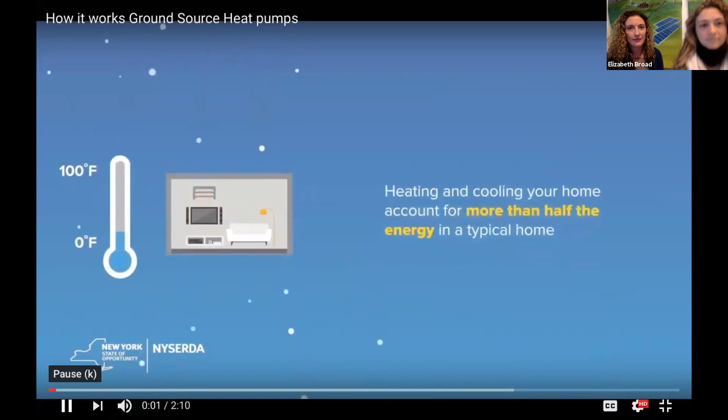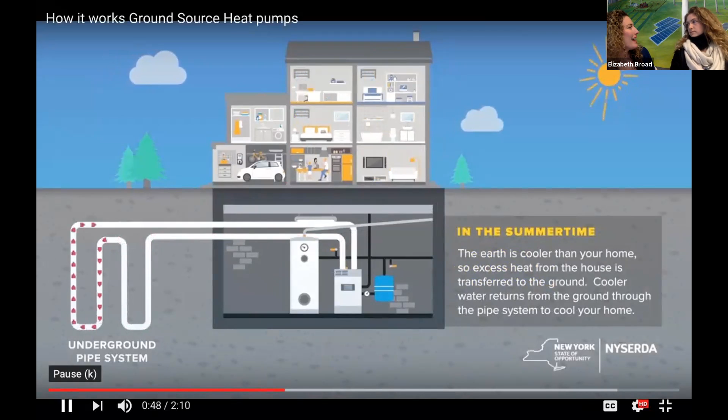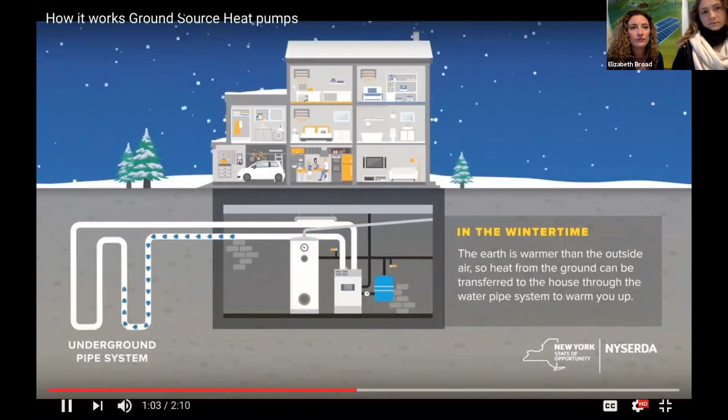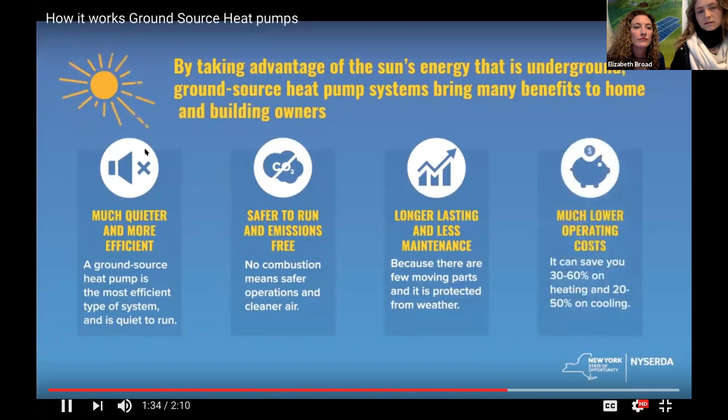All right, just a little intro video for you.

So now we were thinking about, John, do you still want to go next? Or, oh, we're a little bit of an echo. Could that be from Facebook? Possibly, should we try to mute that? Sorry folks, technological difficulty.

So all right, I have Donovan's slides, so I could run his slides or I can go first. Doesn't matter, but I can share his. Okay, that would be great. So Donovan, does that sound like a plan to you since we can't access your screen? Yeah, that's fine, if you want me to go first, yeah. Okay wonderful, so John is going to get your slides up.

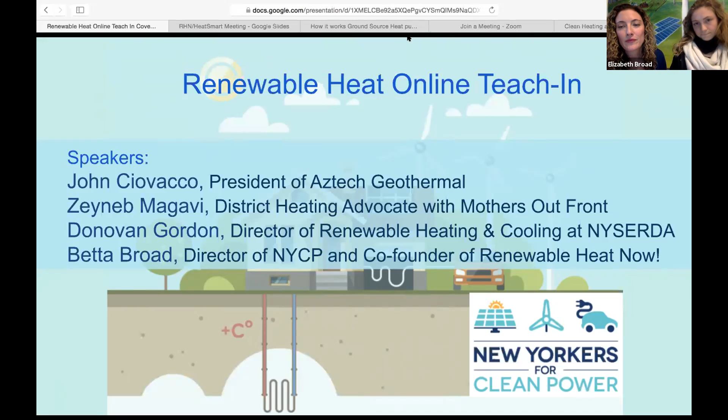Okay, so did we see Donovan's slides? Does Donovan know what slide we have up? Yes, I do. I can see it, John. Well, I know we're on the cover page, so we can just go.

Donovan Gordon, Director of Renewable Heating and Cooling. I'm going to talk a little about some of the programs we have, some of the initiatives that we've been directed to do through DPS, and also talk about what's going on in Westchester, because as most of you are aware, there's a moratorium on new gas connections. So we're doing some things to help in that area as well.

So I guess we can go to the next slide. Working on it. Okay. Next slide. It's good? Yes. Yes, I do.

So I just want to give a general overview. This is sort of the REV goals. There have been other goals set up since then, but the ones I really want to stick with are the 40% reduction in greenhouse gases from 1990 levels by 2030, and then by 2050 we want to reduce our carbon emissions by 80% from our 1990 levels. So really aggressive carbon reduction goals.

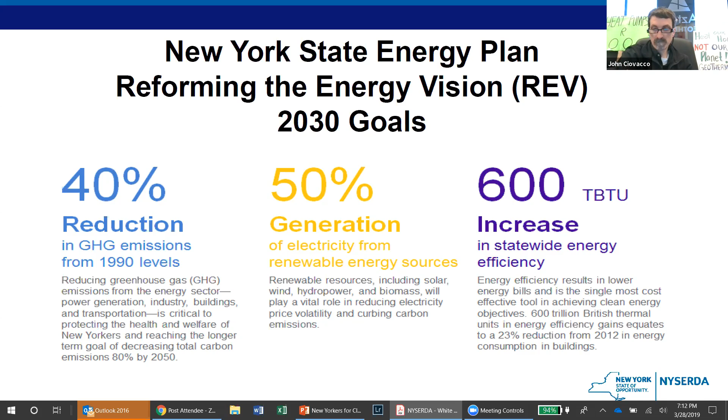So we can go to the next page. I won't dwell on the other parts.

So why is the topic of clean heating and cooling relevant in New York State? Well, a third of all the carbon emissions in New York State comes from buildings, the HVAC systems in residential and commercial buildings. About 41 to 42% comes from transportation, so we do need more EVs. About 20% comes from electric generation. So we have one of the cleanest grids in the country. And as car manufacturers make more electric vehicles, that will take care of itself. We don't make vehicles here, but we can directly impact buildings through various means.

So now we're introducing a new concept, a new term of art called beneficial electrification through heat pumps, because it can help decarbonize the heating and cooling sector. The reason we say beneficial electrification is because for years a heat pump has gotten attention, but not a lot of support, because DPS and others focused on using less energy, energy efficiency. But because so much carbon comes from buildings, and we want to electrify heating with heat pumps that do not emit any carbon on site, we use the term beneficial electrification. So there is a benefit to society for increasing electric usage rather than using fossil fuels for heating.

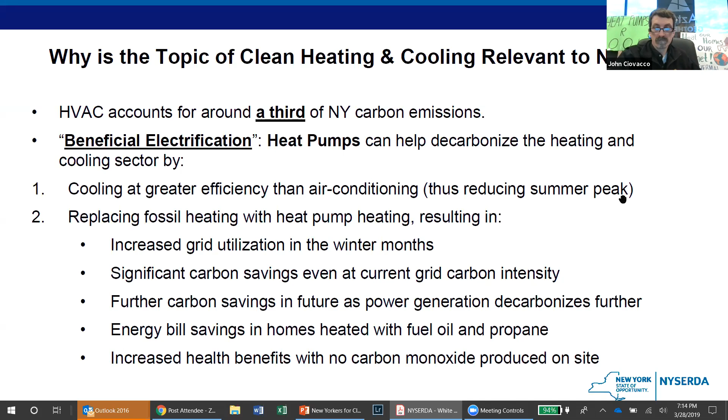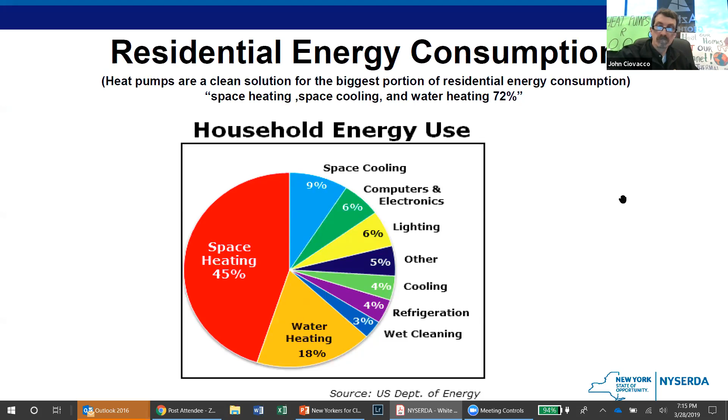So electrification of heating right now, for the foreseeable future, we think at least the next decade or so, there's enough electrical capacity in the grid as it is to accommodate heat pumps, and this would actually utilize the system much better and more efficiently. Quite frankly, each point of increase in utilization, going from 54% to 55%, is about a little over $200 million in ratepayer benefits. So it really is good for ratepayers to increase system utilization because the utilities' revenues are fixed. Any increased revenue they collect above that, they have to give back to the ratepayers. So heat pumps actually help your electric rates come down. Next slide, please.

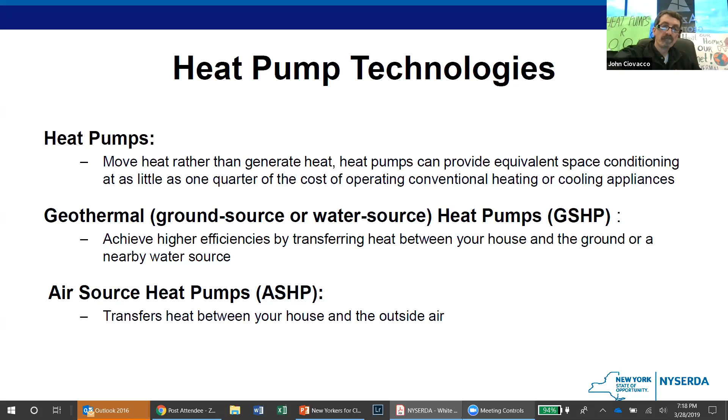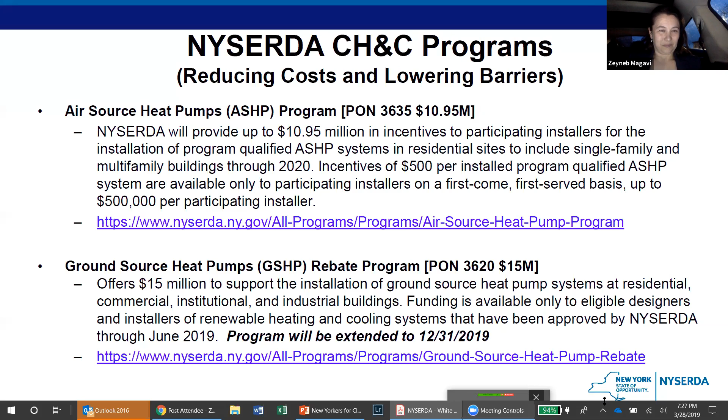For geothermal, it's $1,500 per ton, and the average home is about 4 or 5 tons, so the average incentive is between $6,000 and $7,500—that's actually a pretty good buy down. The air source heat pump incentive is just $500 per unit, but I'll get to another slide addressing that as well. The good news is we're extending this program to the end of this year.

Next slide, please. Oh, you went back—okay, you did go back.

Okay, so now to address awareness: co-op advertising and training. This addresses the lack of trained installers, where we put out about $1.5 million for co-op advertising.

It's cost shared 50-50 with contractors and distributors to do local marketing and advertising. So if they want to run an ad in a local newspaper or elsewhere, they send a copy of the ad to us, we'll vet it, send it to our marketing group, and cost share 50-50 if we think it's an appropriate ad.

And for training with manufacturers, contractors and distributors will cost share 50-50 up to $50,000 per year, same as the co-op advertising, for any kind of training they want to do. Actually, we're close to running out of money there, so that's been a very successful program so far.

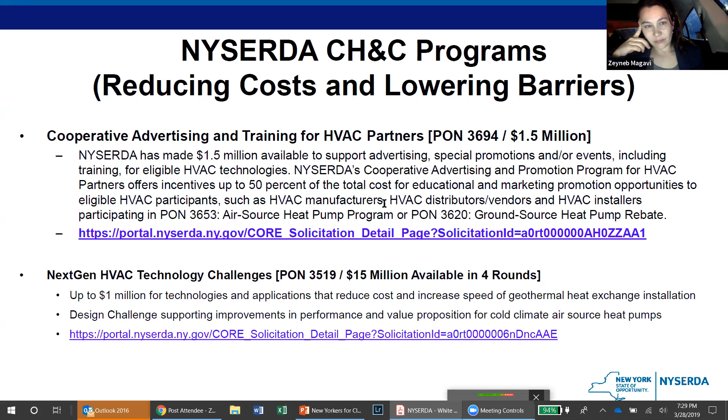And the next gen, that's just our R&D. We're really trying to see what the next gen solutions are. So we're looking at all sorts of different things, from the antifreeze that's used in the loop fields to cold climate heat pumps to, boy, oh boy, so many, the drilling techniques, whatever, the whole gamut. We're open to looking at new and innovative technologies that could help us scale, but also help reduce costs and improve performance.

So in December of 2018, the Department of Public Service issued an order titled Order Adopting Accelerated Energy Efficiency Targets. It's a pretty lengthy document, but what's relevant here is that the order established a target for the utilities to get 31 trillion BTUs of consumer level energy reductions statewide from utilities. However, within that, at least 5 TBTUs of the 31 in reduction needs to come through heat pump deployment.

So this is really great news for the heat pump industry, that the DPS, the regulators, are basically directing and instructing the utilities that part of their order and part of the initiatives they want them to roll out, and certainly in terms of reducing the TBTUs, has to come from heat pumps, and a pretty significant piece coming from heat pumps. I think that equates to maybe 80 plus, between 80 and 100,000 residential homes.

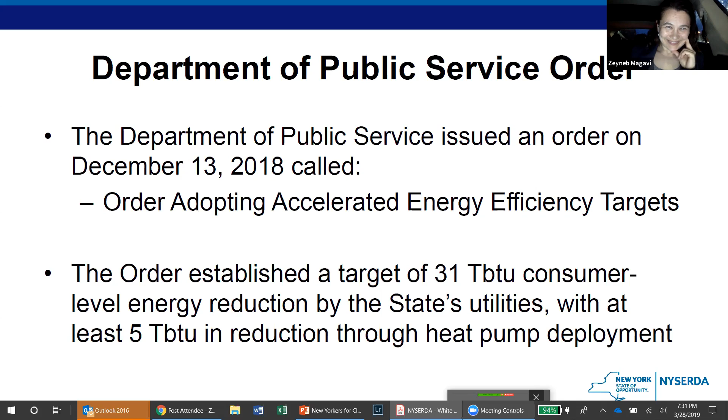So I'll speed up my talk here and run through the rest of it. I'll do double time here now. Okay, go ahead, John. And you can give me the hook anytime, Betta.

Oh, so Westchester, you really want to hear about Westchester, so let's go to the next slide. Westchester kind of imposed a gas moratorium. We've issued what we call a Westchester Clean Energy Action Plan, but we're going to actually drop Westchester off and just call it the Clean Energy Action Plan, to help areas that are impacted by gas moratorium.

So you're hearing this for the first time here. And really, we're trying to help lower energy costs, promote economic development. That's the biggest issue. And in particular in Westchester, the focus is on new construction. That's one of the biggest areas of concern there. So some of these new projects get gas, but we really want to promote and support them getting heat pumps, and obviously do a lot of community outreach and support.

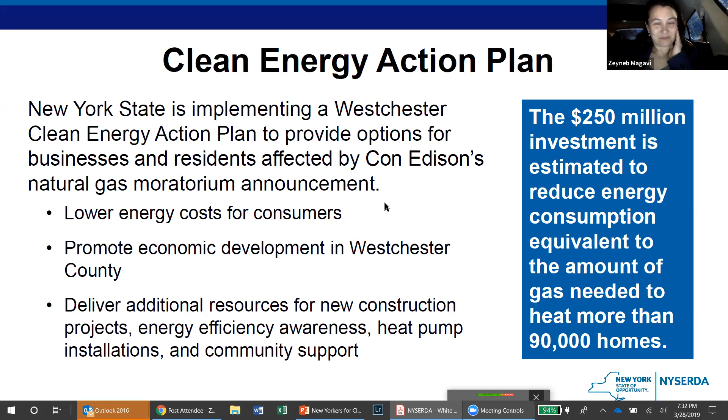So what we're doing, again, this is for the gas constrained areas only. In commercial, I mentioned we had $1,200 per ton. We're increasing the incentives by 25% to $1,500 per ton. And I mentioned we had a cap of 500,000 and $1 million. Again, this is only for the gas constrained moratorium areas. The cap now is $5 million per project.

And we're going to be offering free feasibility screenings for buildings 25,000 square feet or over. For residential, same thing, increasing the incentive by 25%, from 1,500 to 1,875. And for residential, they are now eligible for our financing. We call it Green Jobs, Green New York loans, where they have two options. They can do on-bill recovery, where they pay through their electric bill, or a regular straight loan.

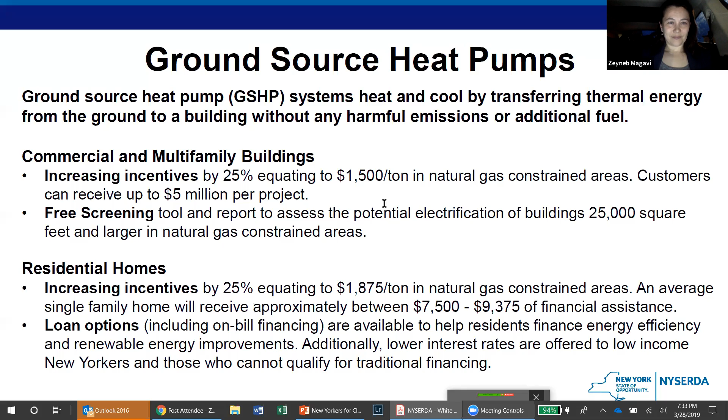For air source, we're also offering free screenings for these large buildings. It's mostly VRF, but for residential, this is something new. We're actually introducing a new incentive, and this is statewide, by the way, of $1,000 per ton for whole house air source heat pump systems.

So this can be ducted or ductless or mixed, ducted with ductless, but it's got to be a whole house solution. They have to issue the contract, have to issue a Manual J, and it's similar to ground source, where the load has to cover at least a minimum of 90% of the full load, a maximum of 120% of the full load. We're working through this, it's not official yet, but I have it in here. So this is a presentation we did to Westchester, so it is probably, it is coming soon, where air source heat pumps will now qualify for our loan program, which is a good thing.

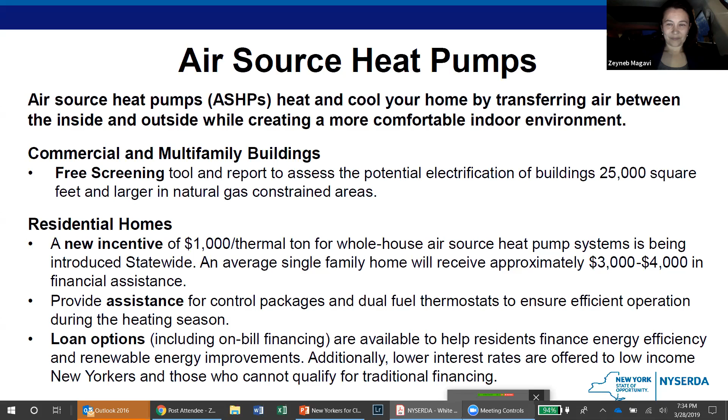Community support—what we've done with Sustainable Westchester, they were focused on an area in northern Westchester which did not have gas, which made sense. Once the moratorium hit, we've actually expanded the scope of their contract, added money to the contract, and we're now asking them to develop some promotions and campaigns down in the moratorium area.

On April 25th, we're not hosting it, it's hosted by a local organization. We are sponsoring it along with Westchester County, and we're bringing large developers and municipal officials to meet and speak with who we believe are some of the best minds and companies in the clean energy space, particularly large-scale geothermal and VRF systems.

The day before that, on the 24th, we're hosting an event to talk about the workforce development needs in Westchester. The response was so overwhelming we actually had to get a bigger room to hold all the people interested in it. So that's the big issue there: economic development, creating jobs, and having something that's reliable, affordable, and viable as an alternative to gas.

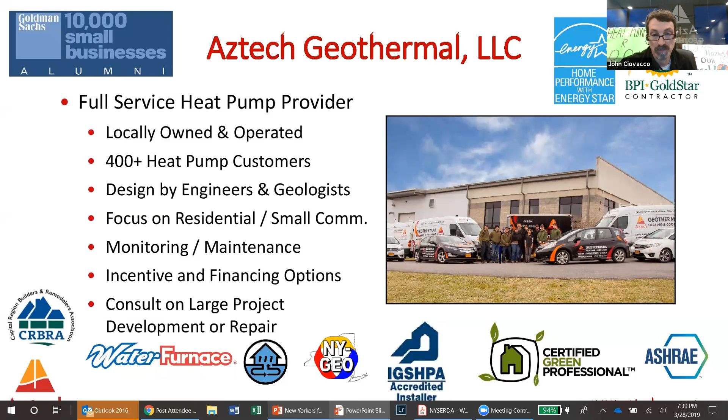And some of the nice co-op work, some of the great stuff, is that video we watched earlier, muted or otherwise, is the background for a piece that we sent out as a direct mail piece. We co-branded it with National Grid, who's now involved, which is terrific. There's lots of things that are picking up, and contractors like us get lots of support now.

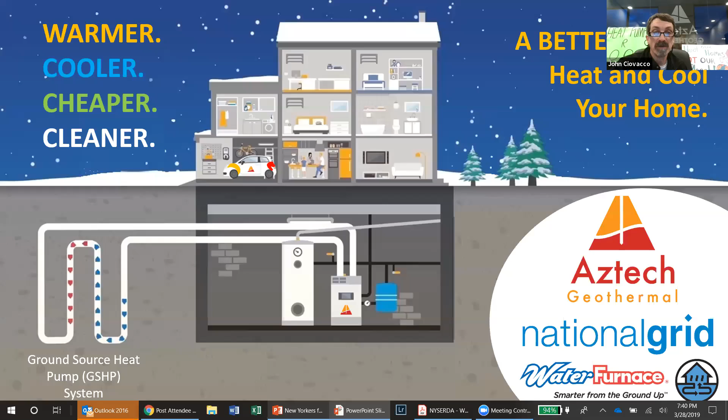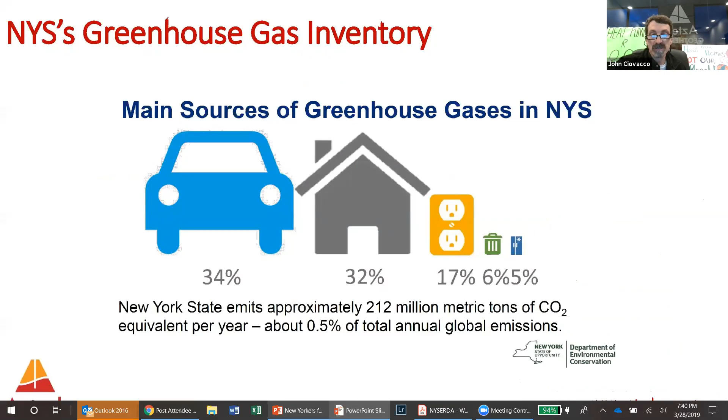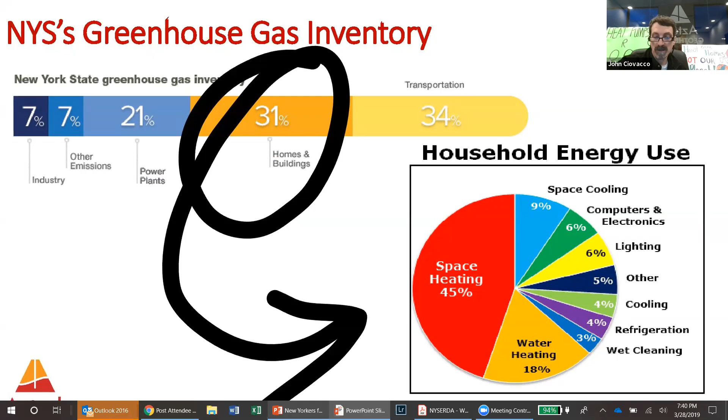Donovan made reference to this, but I think it's important to start with the greenhouse gas inventory, which really tells us where our greenhouse gas emissions come from. Oftentimes there's been such a focus on renewable electricity, which is super important, especially as we get rid of fossil fuels in the building and transportation sectors. But we really have to focus on those big pieces. If homes and buildings are a big percentage, and as Donovan talked about, space heating and water heating and space cooling account for most of that energy, it's really a core part of the strategy New York is implementing, and heat pumps are really the heart of that solution, which is terrific.

The air source heat pumps for water heating have become quite popular. There's lots of interesting economics around where those work well and where they don't work as well in different types of homes, but they're about half the cost and half the electricity of an electric water heater, and they don't use fossil fuels in their ability to make hot water. They're basically using the thermal energy from the basement as their source to make hot water.

The bigger systems, the VRF, I have another slide about that, but that's certainly for larger commercial buildings and can be air source, ground source, or water source. Then there's those different applications of ground source heat pumps that I'm going to talk about more. I'm going to focus more on closed loop because I really think that's a more robust way to go, but that doesn't mean open systems or DX systems can't work very well for certain applications.

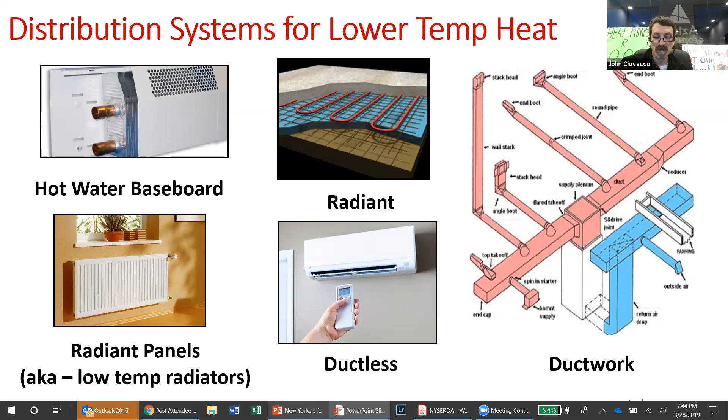You can get a room to 70 with 85 degree air for sure, but you're going to have longer run times. You're going to need a little bit more volume of air to do it. So there's some things that we need to learn as heating and cooling professionals when we apply heat pumps that are different, especially in heating, than we did before.

Let's go into the physics of it all. We won't go into too much of this, but essentially a heat pump system is taking a mild source of energy, the low temperature heat absorbed from the source. So we have tubes out in the ground circulating oftentimes a water solution. That water is bringing thermal energy in and it's going over coils that have refrigerant in them. Those cause those to evaporate. That's the evaporator. That's still a mild temperature, but now the energy is in the vapor.

The compressor makes it warm. We use electricity to do that. The condenser takes that warm vapor and really gets it hot, maybe 160 down to maybe 120 degrees. Then that's really something we can heat a room with. So we're going to blow air over that, or put water over it.

Some of the things that make these systems work particularly well is you'll see the Q1, Q2, and Q3. Q1 is the source of energy, but it's usually a low temperature source. Q2 is oftentimes, in our case, electric energy to the motor on the compressor. And Q3 is the addition of those two. So we're paying for Q2, but that's the small amount of energy. We're getting either energy from the ground or from the air, and oftentimes we're not paying extra for that.

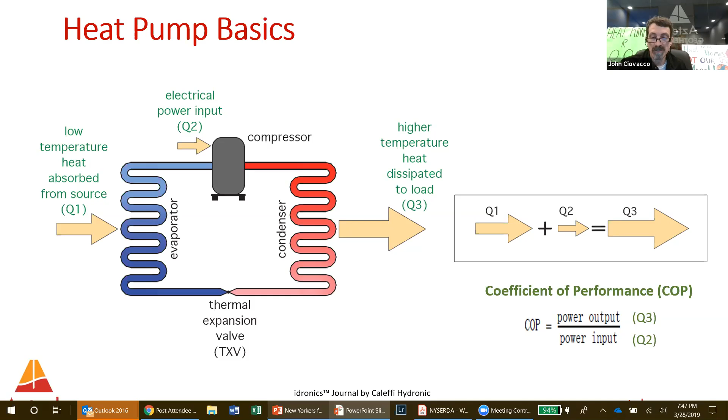A lot of the energy that the ground source system will use comes from the sun. The sun heats the ground, which absorbs a lot of that energy, and then it's stored. So when it's negative 25 degrees in Saratoga Springs and one of our homes is heating with a ground source heat pump, it's basically tapping into solar energy that was stored earlier in the season. So it's a terrific battery, and it gives us the ability to run these heat pumps even when it's very, very cold out, at very high efficiencies.

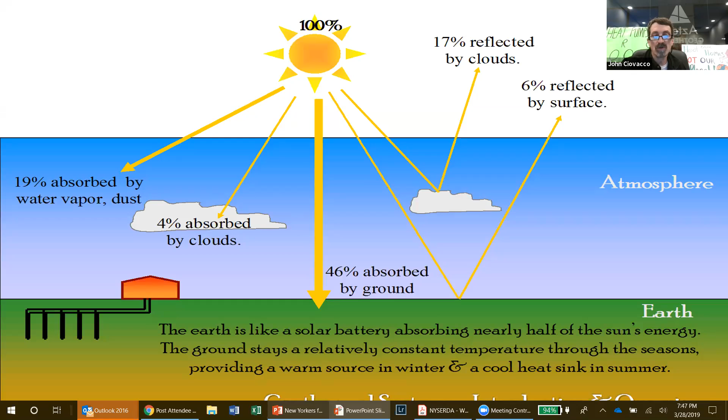Closed loop systems, we bury them in the ground. Horizontal systems in this area tend to be about 6 feet deep and over a large area. Vertical systems tend to be quite deep, so a single family home might have 1 500-foot borehole, which would be a common amount. You might have 2 350s, depending on the size, or smaller ones, but about 1 borehole, deep, more like a water well. But they're not wells. We're going to grout them in and have a closed loop of water that goes down into the ground, pulls thermal energy up into the house, and then the heat pump extracts it.

We have a number of pond loops, probably 12 or 14. When someone has a pond that's proximate to their house and it's the right depth and size, that can be an excellent source and can be less expensive to install because you have less drilling or excavation.

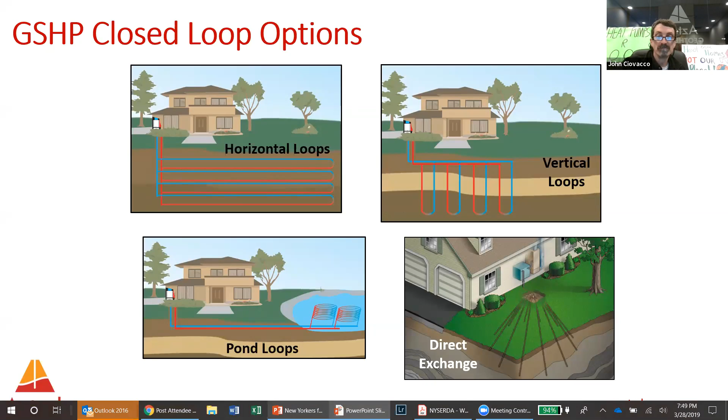This is a real system. You'll see that there's a ground loop that's outside, with 4 trenches buried about 6 feet deep. Then it comes into the house and goes through that black box in the middle of the screen, which has a pump on it, and that brings that energy from the ground to the heat pump and back out to the ground after the heat pump extracts it.

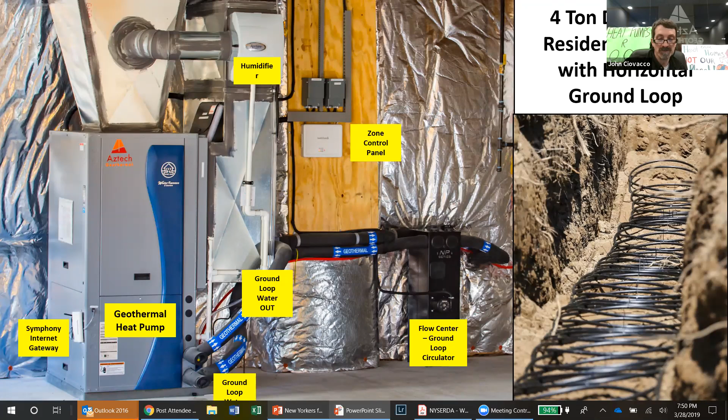But it looks a lot like a furnace. In fact, that one's called a WaterFurnace. So they end up being things that if you walk past them, unless you were really looking for it, you wouldn't see it. It just blends right in and fits in like any other heating or cooling equipment. As a result, lots of contractors are able to install these things. It's not really a terribly specialized skill once you get a little training.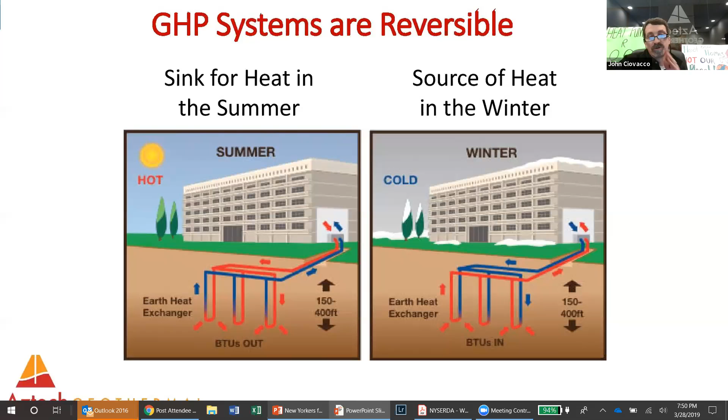The systems are reversible, so they heat and cool. We focus a lot on heating in this climate zone because that's where most of the savings comes from, and most of the greenhouse gas reduction. But as Donovan mentioned, the cooling side can be terrific because there's peak load reduction. They use less electricity on those super hot and humid days where the grid is very stressed, near the limits of our capacity from electric delivery systems, because of air conditioning loads. A ground source heat pump might have 40 or 50% less load on that same day.

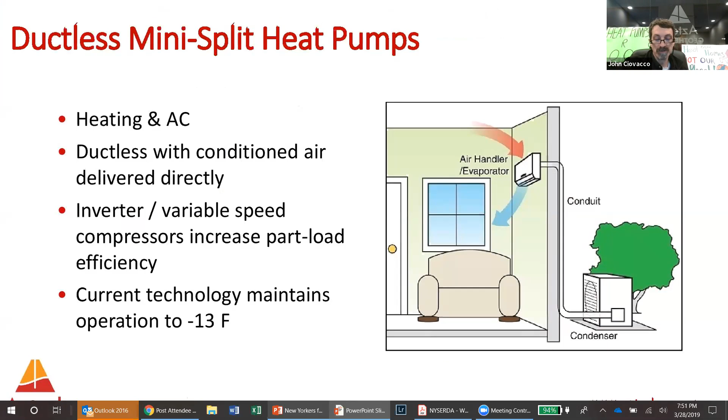Air source heat pumps get that source energy from outside. Even when it's really cold out, you'll see I have -13 there—negative temperatures blowing over these evaporators—they're still able to extract thermal energy, and then the compressor makes it warm enough to heat that room. That particularly works well in a ductless situation because you don't have any losses from the distribution. Basically every bit of heat that you can extract out of it, you get to put right into the house. On a bigger scale, this is sort of like maybe mini splits on steroids.

You've got basically base units, like that unit you saw outside, and they can extract thermal energy from the air and then distribute it to many different places within the building. Many of these systems use refrigerant to distribute to those different places, and there are systems now being developed and installed, especially in Europe, that have a water distribution after they do that to many different rooms. And you can simultaneously heat and cool.

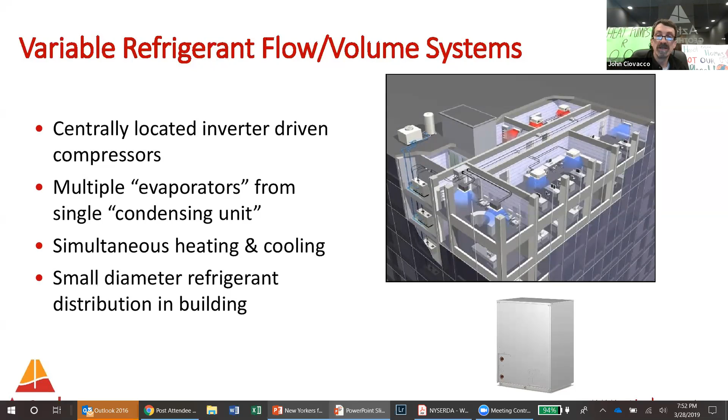You'll see vaguely in this picture, some of those units have blue coming out of them like they're cooling, and others have red. So you can have a single heat pump heating one room while it's cooling another. There's terrific efficiency in that, because that room that's cooling is throwing off heat that can be used in another room. Lots of people want to know, what does it cost?

I made a quick adaptation here, so I have a couple of awkward pastings, but depending on the price of fuel and your price of electricity, you'll get something like this. A therm is 100,000 BTUs. So how much does it cost? A geothermal system and a natural gas system, even with geothermal's super high efficiencies in our state, are about equal at today's prices in a lot of parts of the state.

So they're both low, both inexpensive, but geothermal doesn't save a natural gas customer money on operating. An air source heat pump uses more electricity to do what it does, but it can still show savings over oil and propane systems, which are above it. Then you'll see an electric system, like electric baseboard, that's still 100% efficient, literally—we won't get into efficiencies and how they work—but it's not cost effective. When electricity prices are 14, 15 cents a kilowatt hour like they are up here, and even more expensive downstate, electric baseboard isn't so good because you need a lot of electricity. You're not leveraging it at all—you're basically just using that electricity to create heat directly, not leveraging it to get renewable thermal energy out of the ground or the air.

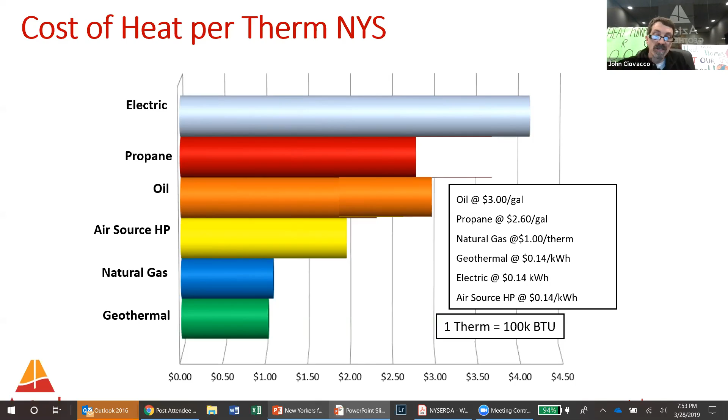Now, the other big benefit that gets talked about a lot is how do we reduce carbon? It's relative to other things and how much you give off. Air source heat pumps and geothermal systems certainly can have no carbon footprint if you have 100% renewable electricity coming to them. Natural gas, propane, and oil struggle with that. There are certain biogases and things, and we can do some math on that, but there's a carbon footprint related to burning those fuels on site.

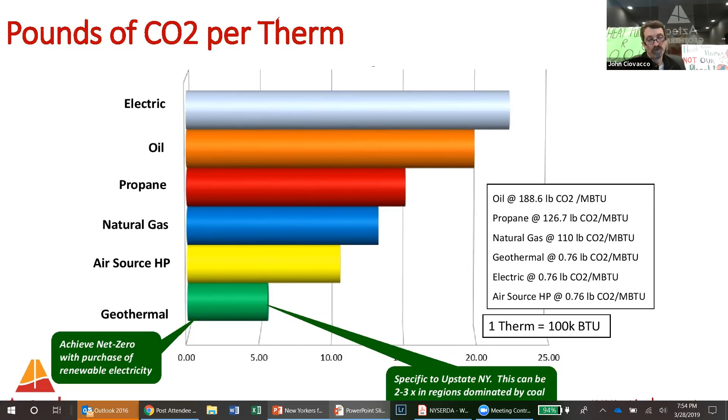Electric, by the way, if you just use electric baseboard, there's a carbon contribution to grid electricity. And if we use enough of it, it turns out that is not a particularly clean technology to use unless you have a tremendous amount of renewable electricity to offset it.

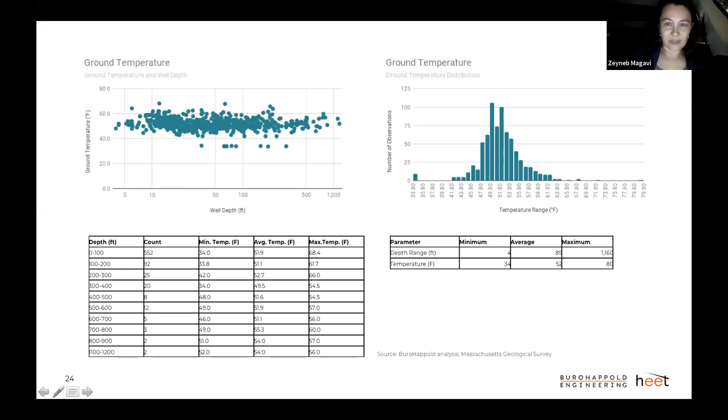I'm going to hit share screen and hope it works. Let's see. One second. Oh, and you got it. Yeah, I'm of course right in the middle of my presentation, so we'll just get a backwards preview here.

That's okay, everybody on this call is an advocate, interested and patient, and just happy that you could join us. Well, I'm really glad to join you guys, and I think everything that's going on is really exciting.

I'm actually going to tell a little bit of a story. I'm going to try to do it very quickly to get to the meat of it, but I want to make sure you have the backstory because I think it's really interesting to have a possible solution come out of kind of grassroots action. And this is a Massachusetts-based story, but it doesn't have to be. So I represent both Mothers Out Front, which is a grassroots organizer, and also HEET, which does a lot of research and innovation. We've been working together on this, so it's jointly presented with 2 hats on.

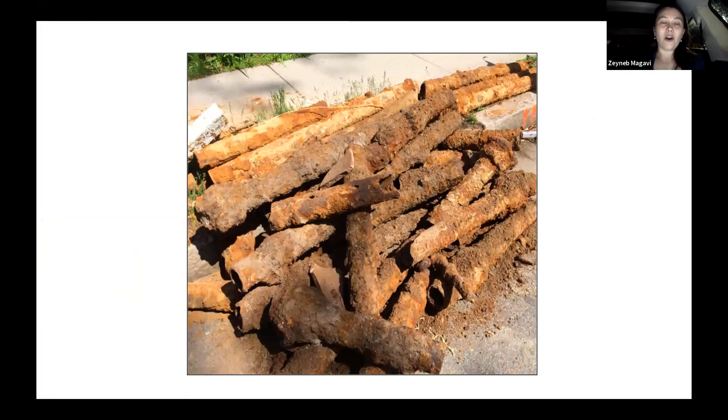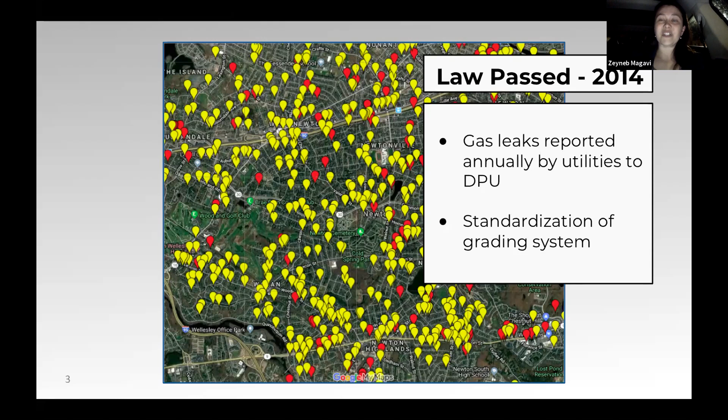All of our work started with these rotten gas pipes in the ground leaking. And the reality of gas leaks was, nobody loves them. So it became a great organizing tool that built a lot of power in Massachusetts. We were able to get our first law passed requiring the utilities to report all the leaks, which really started to change the narrative about gas.

We also got a second law passed to get the largest emissions leaks fixed, again, changing the narrative to connect it to climate change. In the process of doing this, we did research together with the gas companies to figure out how to do that, and built relationships with Columbia Gas, Eversource, and National Grid. These are the 3 presidents of those companies with some of us.

We realized that the ecosystem we built could be used to do something beyond just triaging. We'd been sticking Band-Aids on holes and gas leaks instead of transitioning off. And what we also saw happening in Massachusetts, and I know it's happening in New York as well, is that the old leaky gas pipes are getting replaced at an extraordinary cost with new gas pipes. And that money in Massachusetts is more than $9 billion.

Zeyneb, sorry to interrupt, but you just got a little muffled for some reason. I don't know if you moved or something, but now it's not, yeah, I don't know. It sounded good before, but it sounds a little muffled. Oh dear, okay, there you go. You're back, so good? Yeah, okay.

Perfect. All right, so this money being spent, we identified as a huge issue, a huge financial risk for us as citizens and ratepayers, and also for the industry, because it's $1.7 million per mile of new gas pipe that's last century's infrastructure going in, getting paid off over 40 years.

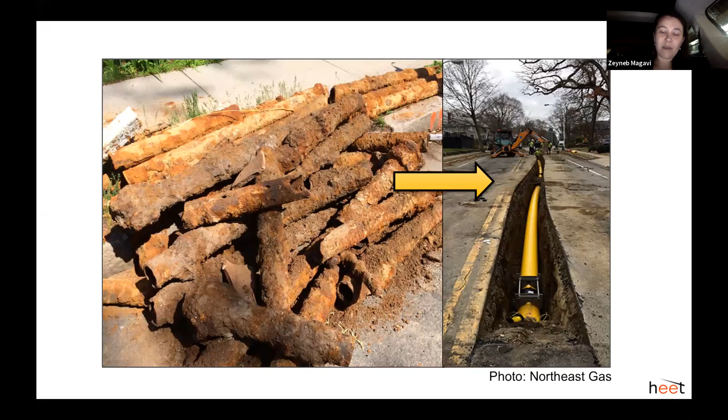That 40 years extends past our greenhouse gas goals mandated in the state. So we're digging in stranded assets that we're all going to pay for long past we need them. So we asked ourselves, these gas replacement plans - we mapped them and identified segments where we could prune the tree of the gas system and try piloting other solutions.

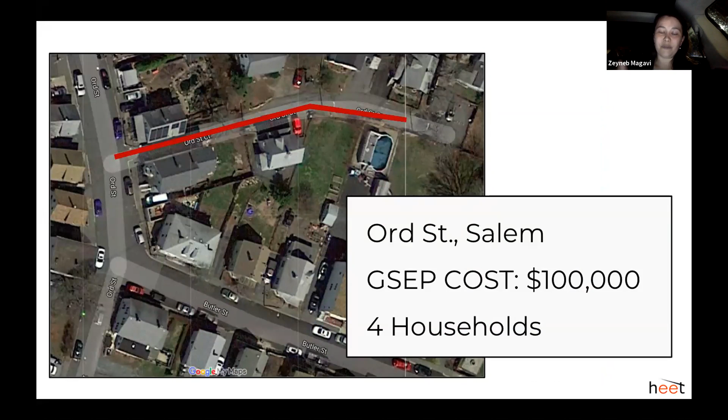To show people that now is the time to move off and redirect all of that funding to renewable thermal solutions. So, this is the launch of the Energy Shift project, and I'm presenting HEET slides here. We looked first at the more obvious solar heat pump. Geothermal was very exciting to us for all of the reasons that have been presented, and they're all great solutions.

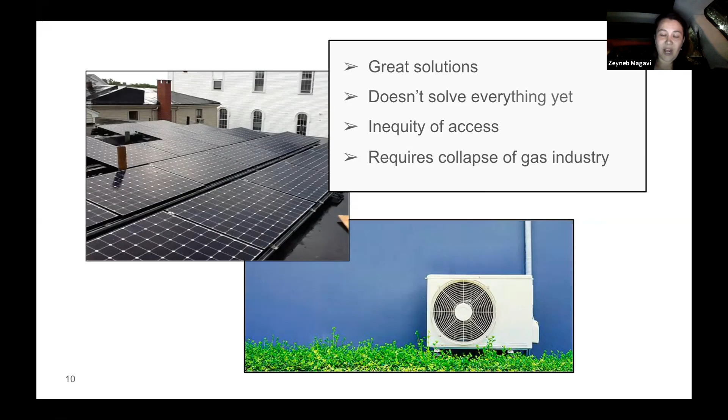But we were worried about trying to do it for the cost of those gas pipes, and also about the house-by-house approach and kind of an inequality of access to renewable energy, and how to approach the collapse of the gas industry. These are complicated problems, and they raise the question of whether we should be doing renewable thermal at a household or at a utility scale.

So we started looking around the world at utility scale thermal solutions. For example, we looked at Stockholm, which has district energy. So district energy, which is basically delivering, in the old days steam, but more modern district energy, hot water, low temperature hot water, to people's homes for their heating, and producing it usually centrally.

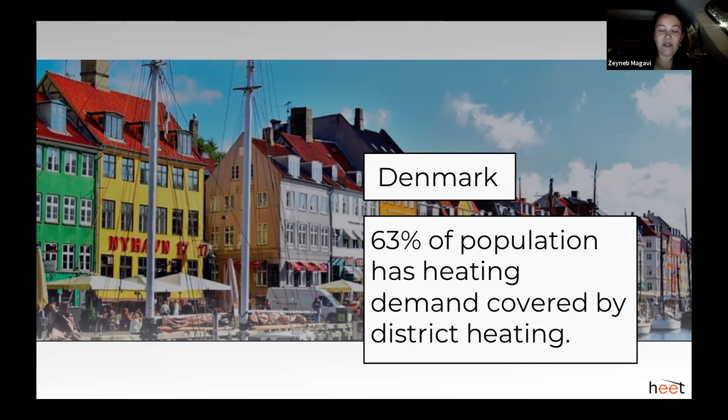In a place like Stockholm, they're gradually greening that production, but it is still fossil fuels, as in Denmark, where most of the population has this district heating. And it is more efficient. They have dropped their greenhouse gas footprint tremendously by doing this. But again, we're still generating that heat with some fossil fuel use.

So in Paris, they're piloting geothermal powered small district energy, micro district energy systems. And that started to really perk our interest that perhaps this could be done renewably, that we could have thermal energy delivered to people's homes in a utility scale, renewable power.

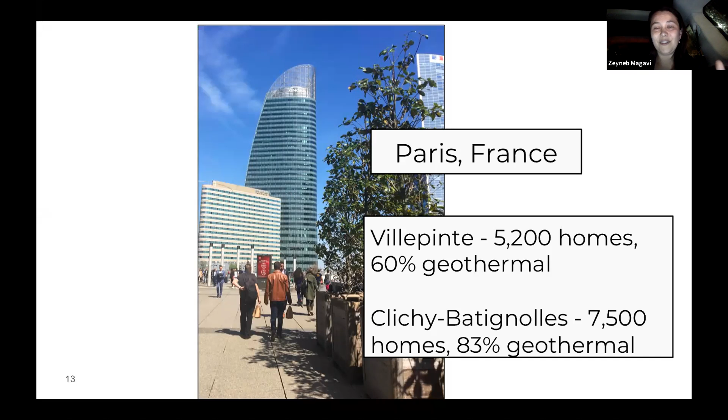With renewable power. And so the challenge is, of course, that these examples in Paris were deep geothermal, which is very, very deep, very expensive, and really only works appropriately cost-wise in certain geology. So we also just didn't have the scale to build an entire district energy system. We couldn't convince anyone of that.

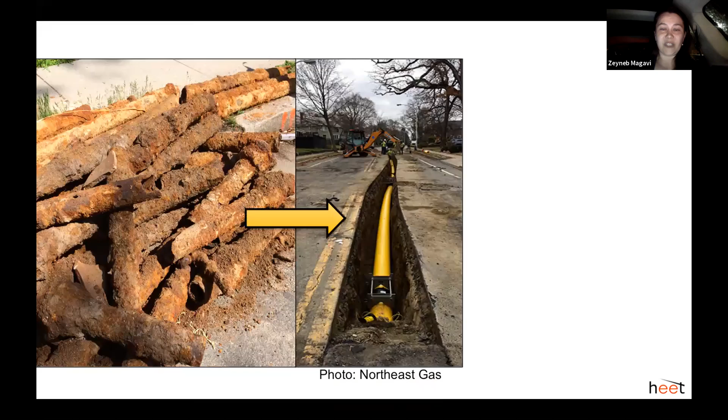And we did want to try replacing those gas pipes instead with hot water pipes. So we came up with the idea of doing very small street segment hot water loops, or cool as well, obviously, with geothermal heat pumps using shallow boreholes in the gas company right of way. And using this renewable thermal network to deliver heating and cooling to customers' homes. It would be owned and installed and maintained by the ex-gas company that is then becoming a renewable thermal company.

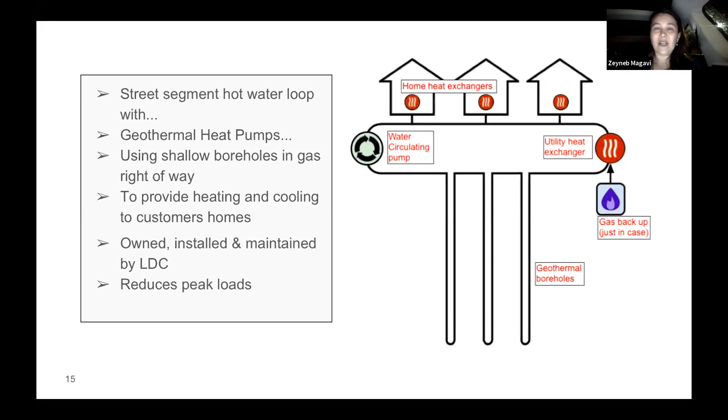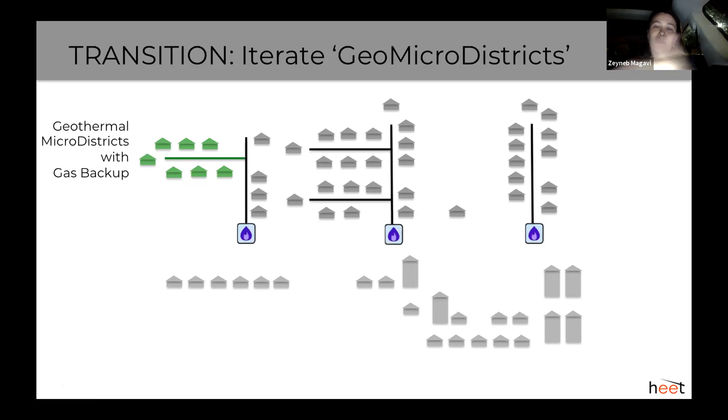And so many of the benefits of geothermal have been mentioned about reducing peak loads and generating both heating and cooling and all of this. So to skip quickly ahead to give you a better idea, we were still looking at those little branches that we had the opportunity to maybe change and had the funding we could redirect. And building one of these geothermal microdistricts, even allowing the gas backup as you move backwards, but in one segment, and then building more segments, a little bit at a time, interconnecting them and backing up, building a district energy system that is renewable and resilient, and also very efficient, kind of from the bottom up.

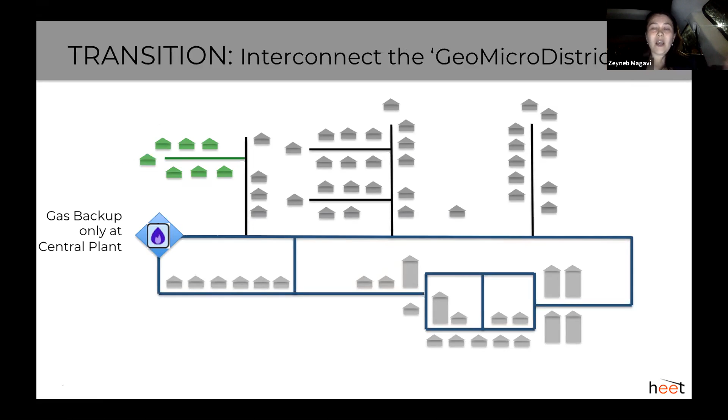So that's a really interesting idea that we got interested in and talked to a lot of people about. A lot of the gas companies were very interested. Our local agencies were interested, but it's still a really big thing to make happen. And we're approaching it on 3 levels.

The first and most important level to us is actually on the household level, because if the consumer doesn't want to move off gas, it makes it harder. So we have been running Taste the Future cooking events, focusing on the gas stove transition to an induction stove, and are running a statewide competition for that first street segment to pilot our district energy, the geothermal idea.

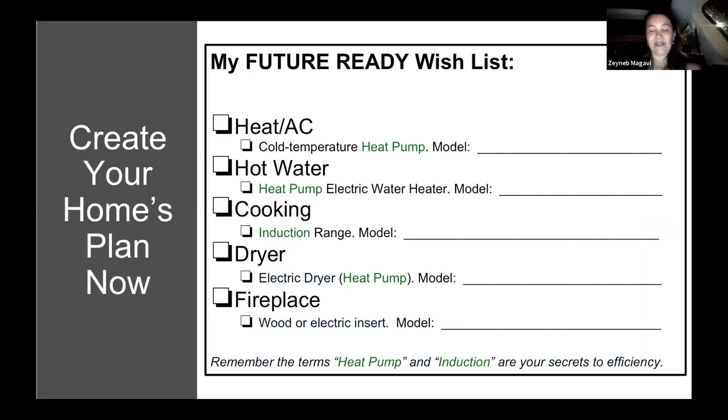The Taste the Future parties ask everyone to just be ready to transition, to have a list on their refrigerator with their renewable ready appliance choices for when their appliance dies. On the infrastructure level, we've hired a global engineering firm, Buro Happold.

We're having trouble hearing you again.

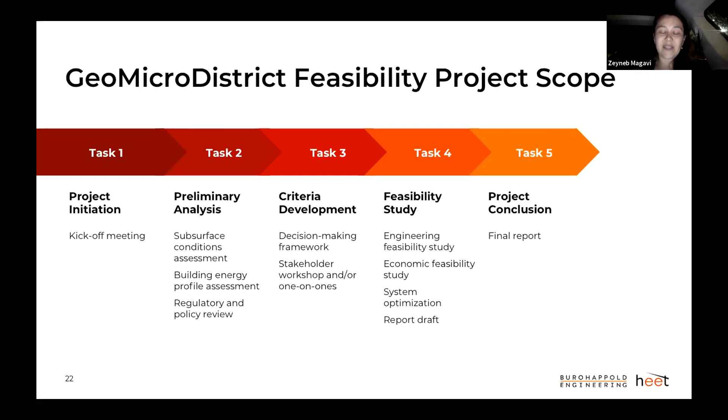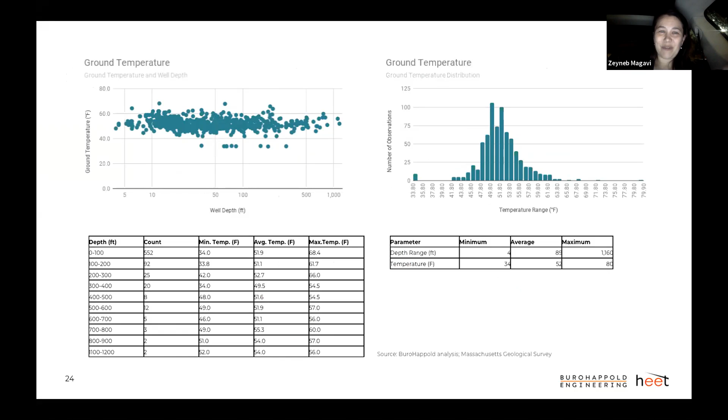Buro Happold Engineering is doing our feasibility project, which will be complete in May, looking at the economics and engineering for the state of Massachusetts, and what scale this could be implemented at and the cost to consumers. We're starting from the basics: analyzing geology, hydrology, energy use, ground temperature range, and all the potential technologies, trying to put them together in a system to optimize the idea.

The last, and I suspect most important, level is governance. We got laws passed in 2014 and 2016, and another in 2018, part of which was a waiver from regulatory requirements to allow the pilot to go forward. But we need a lot more than that to make this idea work, including permitting a gas company to bill for BTUs.

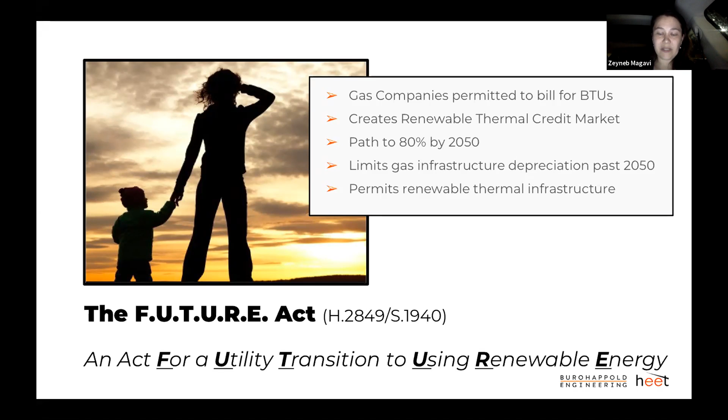We decided to create a renewable thermal credit market with a path to 80% by 2050 to match our state's targets. We also decided to cut off gas infrastructure depreciation—we shouldn't be paying for gas infrastructure past our renewable targets. That's a pretty bold act we're calling the Future Act.

It's supported by the fact that the idea of transitioning off gas in Massachusetts has become much more publicly acceptable after the Merrimack Valley gas system collapse. People are interested in transitioning off gas in a way they weren't before, and that's driving a lot of the political support.

I know in New York you also have a similar all-hands-on-deck moment with your moratoriums. It does feel like across all the states there's really a moment of opportunity to drive renewable thermal forward right now.

So thank you. Fabulous, thank you so much, Zeyneb. It's really inspiring to see what you're doing, and you're not too far away, so we can do the same things here in New York. We just have to put our heads together, and I love your all-hands-on-deck approach. Thank you for sharing. I know there are going to be lots of questions, and we only have 20 minutes left, or 22 minutes—we really were trying to wrap by 8:30.

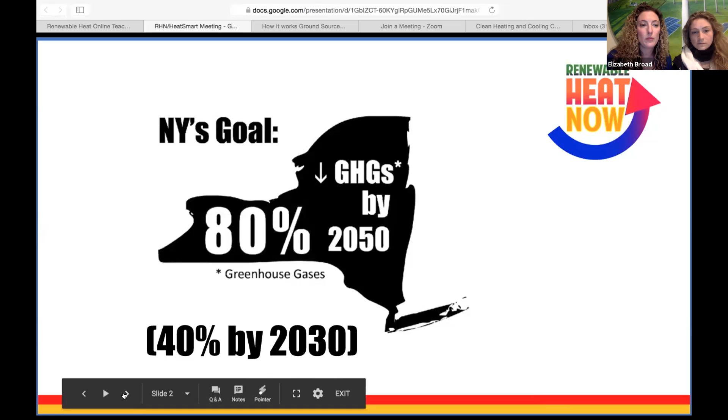Many of you have already heard about our super ambitious goals, so we'll just go through these quickly. You've heard from everybody else about the importance of getting off gas and on-site combustion of fossil fuels. How do we achieve these ambitious clean energy and climate goals? We've touched on this: maximizing efficiency, electrifying everything, and having a 100% renewable grid one of these days—we're getting there.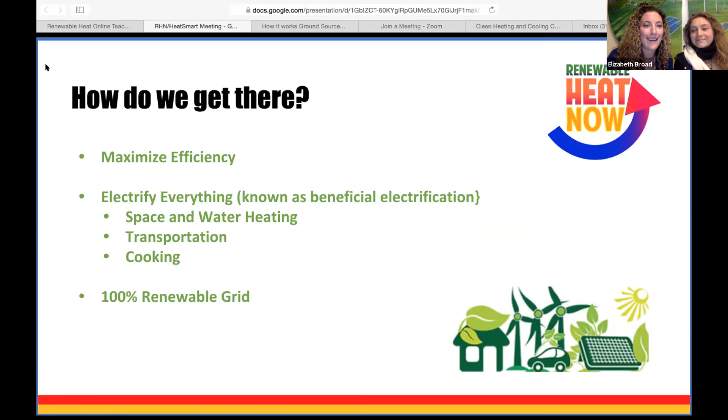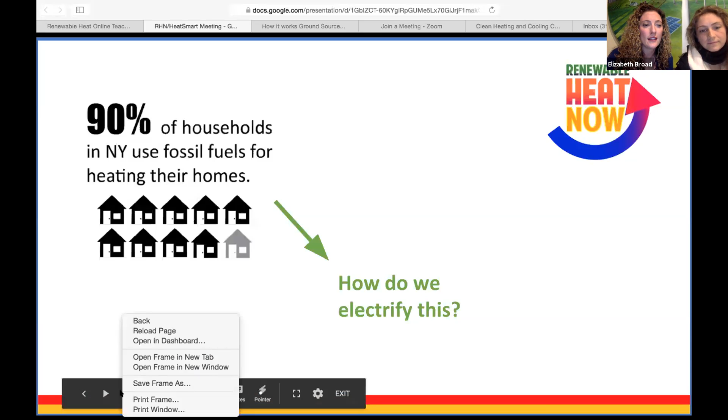Hold on, my slides are not moving. There we go. Okay, 90% of households in New York still use fossil fuels, so we've got our work cut out for us. I'm going to keep skipping because we've already talked about all this.

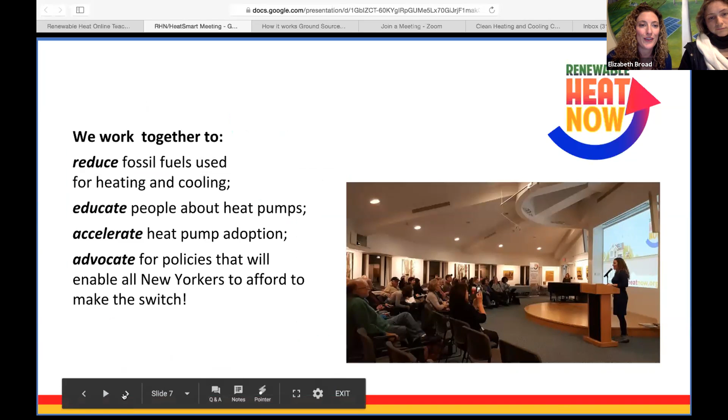So here we are, Renewable Heat Now. We're a coalition, and we work to reduce fossil fuels used for heating and cooling, educate people about heat pumps, accelerate heat pump adoption, and advocate for policies that make these technologies affordable for all New Yorkers. We've done lots of teach-ins and events all across the state.

We had Jerry Acton from Physicians, Scientists, and Engineers do some research and come up with this number, which is a little higher than yours, Donovan. I believe NYSERDA's estimates are that we need 25,000 heat pumps, or homes, to be converted to heat pumps.

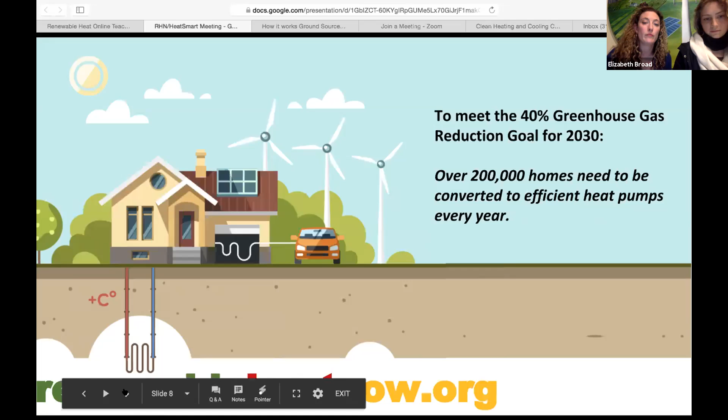Jerry's number was a little bit higher, 200,000, but in any case, we have to go big. Even that 25,000 number that the state is currently working from is a 10-fold jump from where we are now. So we have to go big.

Here's our platform: improving rebates and incentives, having additional incentives for low-income households. In the building codes that are going to be changed in 2021, we want to eliminate fossil fuel heating in new construction, and we want to reverse this policy that incentivizes customers to switch from fuel oil to natural gas.

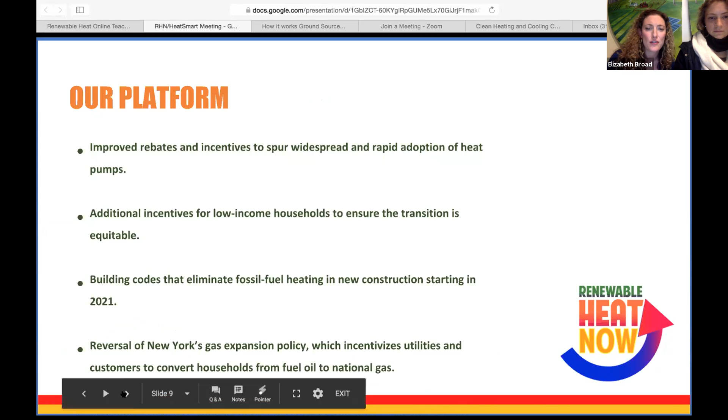Who are we? We are New Yorkers for Clean Power, Alliance for a Green Economy, Fossil Free Tompkins, Sane Energy Project, Frack Action, Heat Smart Tompkins, and York Geo. We recently had Mothers Out Front and Earth Justice join our coalition as well.

I'm not going to go through all of this because we'll be here all night and I want to get to your questions, but we've had a very active few years. We got together in 2016 and had press events and organizing across the state to call on the governor and New York State to implement a really robust program.

At the time, we were calling for a geothermal tax credit, but what we ended up with, which was even better, was a $15 million rebate program for ground source heat pumps, which was fantastic, and $11 million, which now is going up, for air source heat pumps.

So what have we done? Tons of press events, rallying, delivering petitions and postcards. We've gotten involved with rate cases. Members have become interveners in rate cases to really try to influence the utilities' programs, and again address this issue of incentivizing gas, and instead propose rates that would incentivize beneficial electrification, not only for heat pumps but also for electric vehicles. But our focus tonight is on heat pumps.

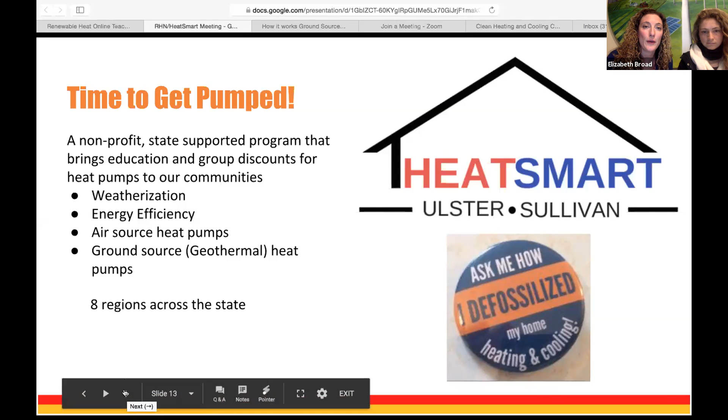These campaigns are going to be operating in 8 regions across the state, and I think more are coming. Let me know if you want to get connected to one near you, would love to help make that happen. There was even an event tonight with Heat Smart Central New York about heat pumps, and some folks couldn't participate in this, but that's okay because it's being recorded.

That's it, so I think hopefully I did that relatively quickly. It was going to be a little bit longer, but covered the highlights. We continue to forge ahead and are really excited by the excellent news that Donovan announced tonight, and looking forward to continuing to accelerate the adoption.

So let's get to questions. Okay, yeah, a lot of the questions are more about the technology, so I guess we'll start with some of those.

Does the hydraulic fracturing of geothermal drilling have any of the unfortunate side effects that come with hydrofracking for fossil fuels? Are there any ways to mitigate them? I've been wondering this for a while, thanks.

I think if you want to take that, John. So I guess the quick answer is when we're drilling for a geothermal heat pump system, we're not using hydraulic fracturing techniques. Fracturing is used sometimes in the development of a water well because you're trying to free up the aquifer from some of the fracture zones, like you would with fossil fuel drilling, which is much deeper, where you're trying to get the fossil fuels to move out of fracture zones, hence the fracturing. So it's probably a longer discussion that we won't do now, but I think there's probably a misconception about how geothermal drilling works.